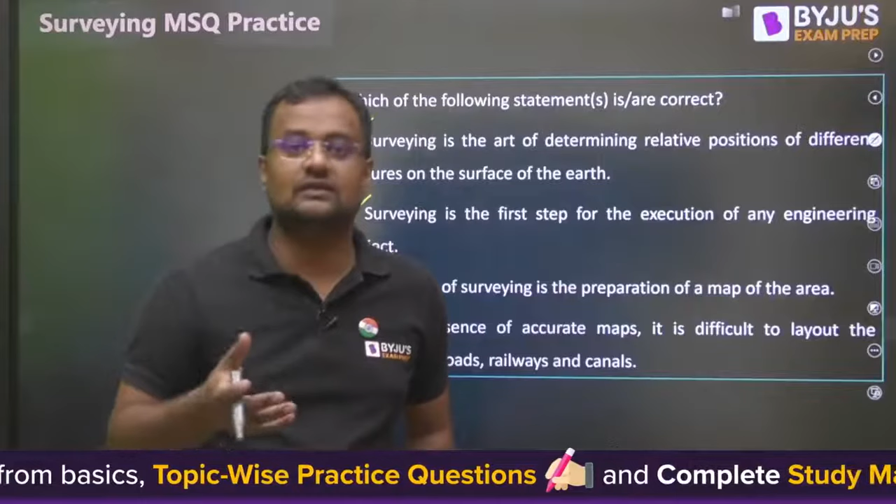Of course, the survey of that area has to be done for knowing the topography and all other things. Then after that, the object of surveying is the preparation of map of the area. After doing the inspection and taking the field readings, we draw the map of that area.

In the absence of an accurate map, it is difficult to layout. Yes, if accurate map is not there, it will be difficult.

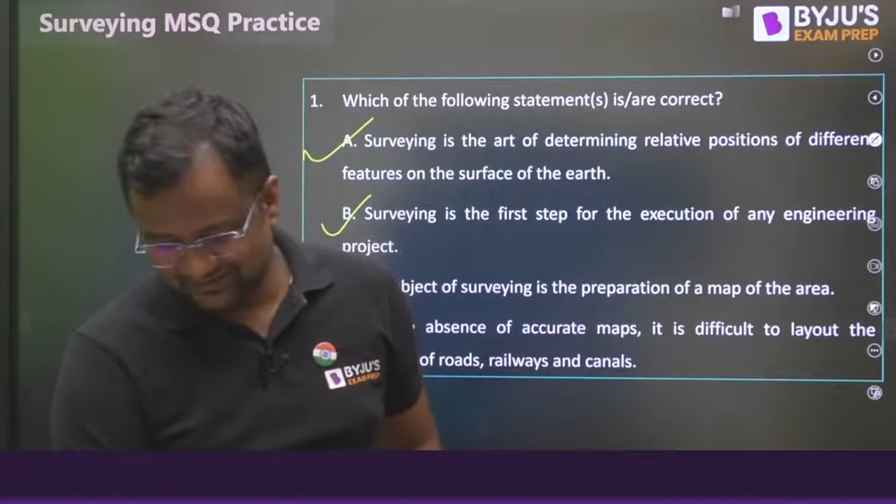So of course A, B, C, D all will be correct. Yes, Jadip, my offline student from Indore. How are you, Jadip? After a long time, yaar, very very excited to see you. Okay, A, B, C, D all will be correct.

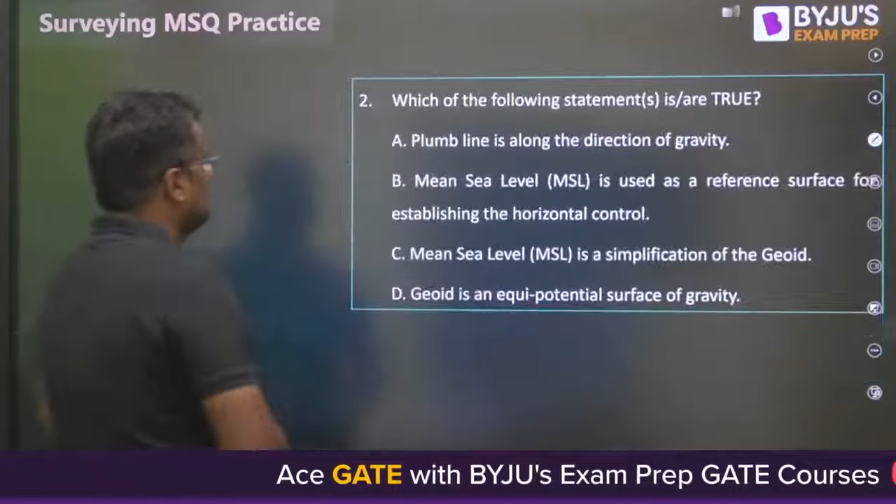Okay, so some of you are giving the answer by thinking MCQ. Okay Jadip, now which of the following statements are true? Plumb line is the direction of gravity.

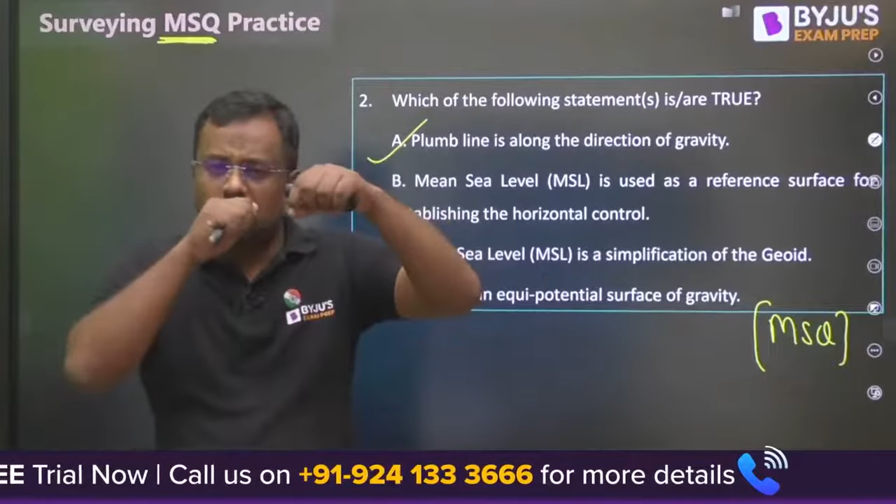Correct, okay, plumb line is the vertical line. At any place if you throw the plumb bob, if no other force is there, no wind force, then only gravity is acting, so it will be towards the center of earth. That is also called vertical line, that is also called the plumb line.

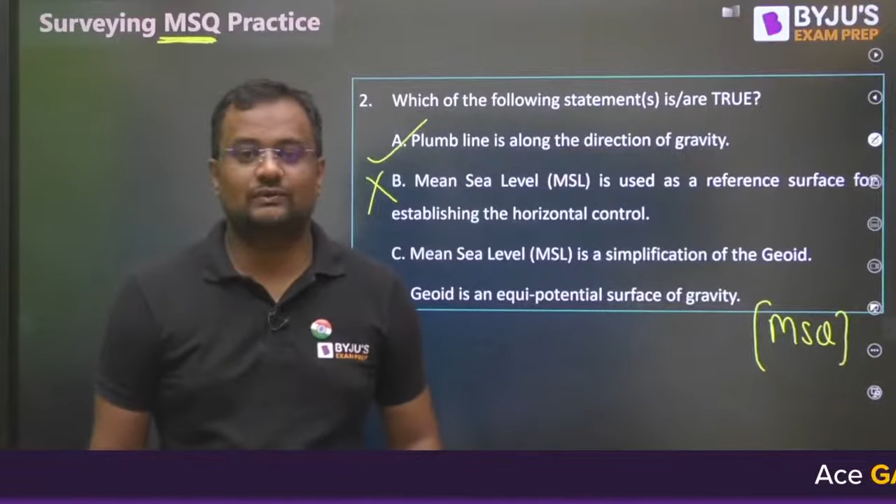Mean sea level is used to level, how? Mean sea level itself is not horizontal. So how will it be taken for referring or for plotting the horizontal points?

Mean sea level is above the earth, the water layer is like a sheet above the earth, so that is curved. Mean sea level is a geoid. Geoid is the shape of the earth. Water is above the earth, water takes the shape of that. So whatever is the shape of the earth, water is above that, so the same shape will be there.

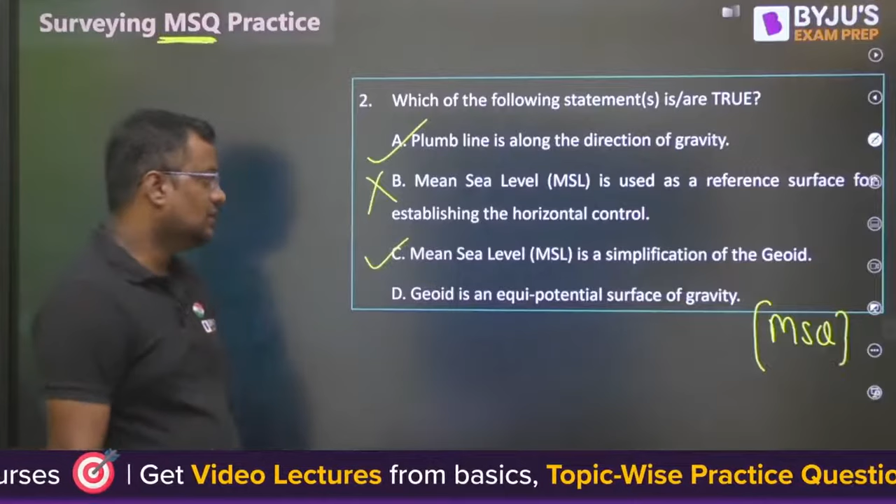Geoid is the equipotential line of the gravity. Yes, all the points on the surface of the earth have equal amount of gravity. So here it will not be ABD. Raghvendra, it is not ABD. It is ACD. Okay, so we started with some theoretical questions.

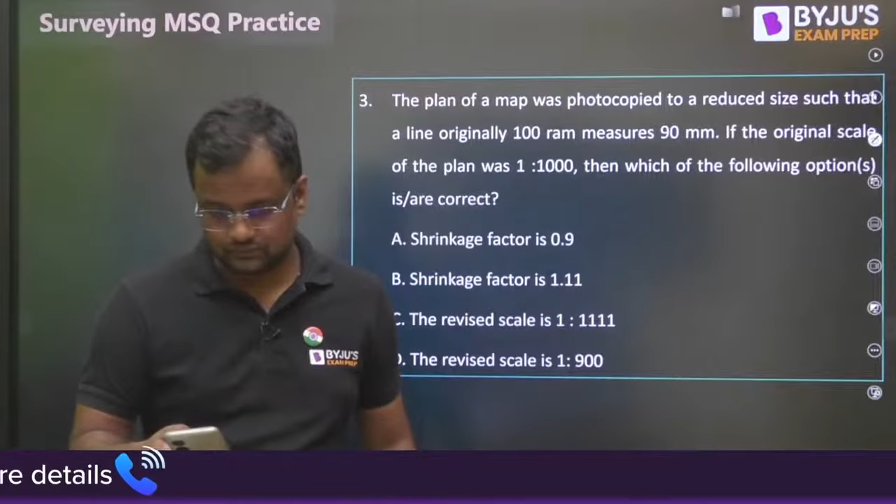My also one of the favorite subjects is physics. I also know that when you draw a tunnel here and leave a person here, the movement of the person will be harmonic motion. I also know that gravity is derived from the force between the two bodies. Mass M1 is the mass of the earth, M2 is the mass of that body, upon r square. This is the force between the two bodies.

Now from where does the acceleration come? Acceleration comes from force divided by mass. So acceleration, that means force divided by mass 2, is g, the gravitational constant. Mass of the earth is constant, r square is constant, this is constant, this is constant. From here, 9.81 is derived. Okay, Ahmed Saab.

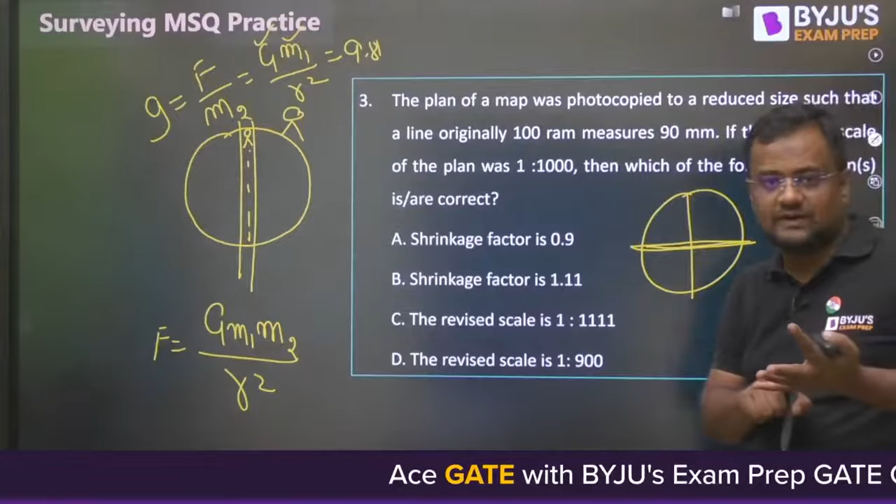Now geoid is not, earth is not exactly a sphere, because the polar axis is smaller, the equatorial axis is 43.5 kilometers bigger. Earth is neither a sphere nor an oblate spheroid, no regular geometrical figure signifies the shape of the earth. That is why a new name has been given, geoid. And from the geoid center, every place is not equidistant. That is why, since r is not the same, it will not be 9.81.

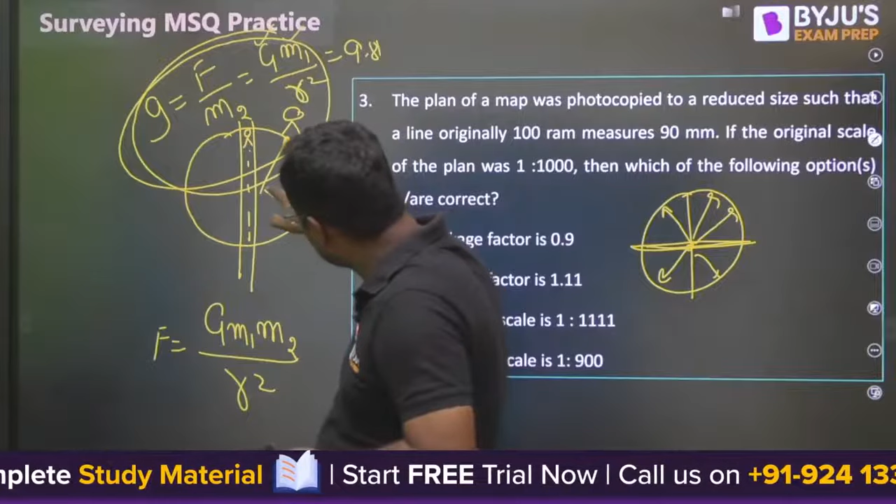This formula is considered when r is same. r at this point is also same, r at this point is also same, that is assumed to be sphere. Then this formula has been derived. The whole physics, and gravity being equal to 9.81, has been derived by assuming earth to be a sphere.

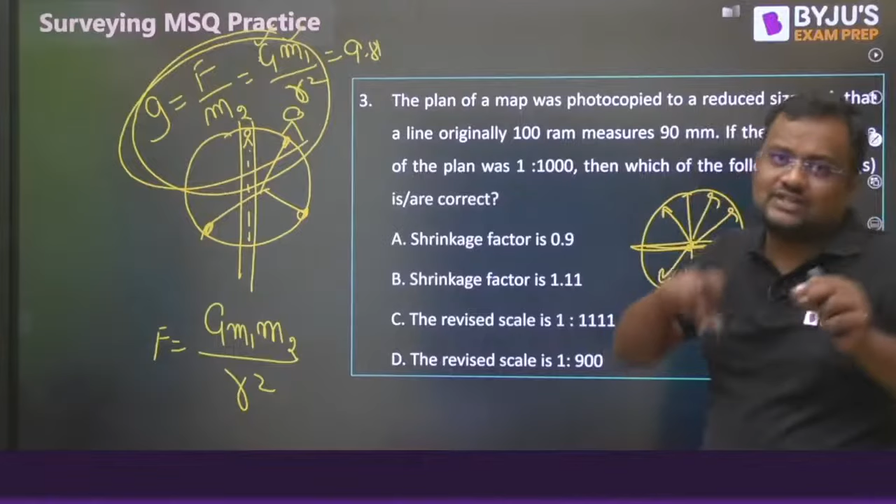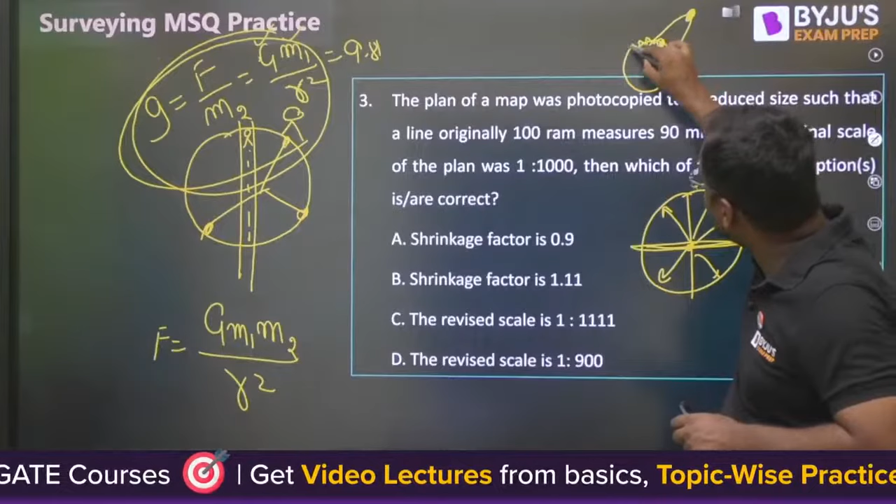So the point you are saying is it is an equipotential surface of gravity. In reality there is a little minute difference, but actually all these things are derived by assuming the earth to be a sphere. So yes, there is a little deviation - if you see, gravity is 9.81, but if you go to a very high altitude place or to space, on Mount Everest the gravity will be less.

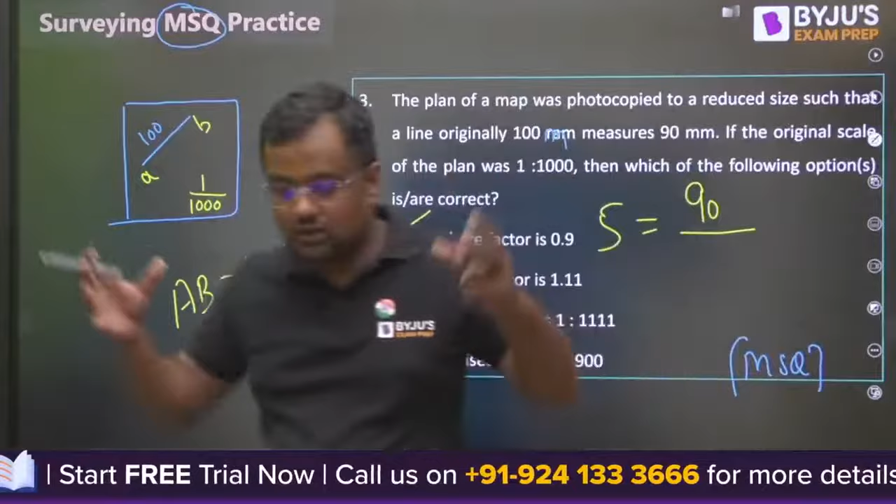On ground, if you take a small map of India, a big map of India, the distance between Delhi and Mumbai will be same. If you take a small map of India or a big map, the distance between Delhi and Mumbai will be same. So original distance will be same, that is 100 into 1000.

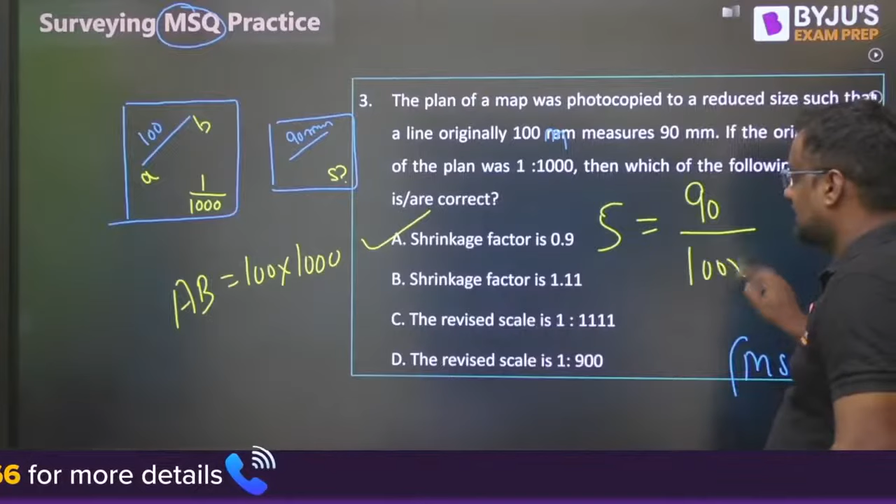From here, what value is coming? Please, can you let me know? What is the value coming? Is it coming 1 by 1111?

And I also told one more trick. Okay, this I derived, or I get the answer this way. One more trick guys - if the scale here is 1 by 1000 of the original map, 1 by 1000, can you see it below?

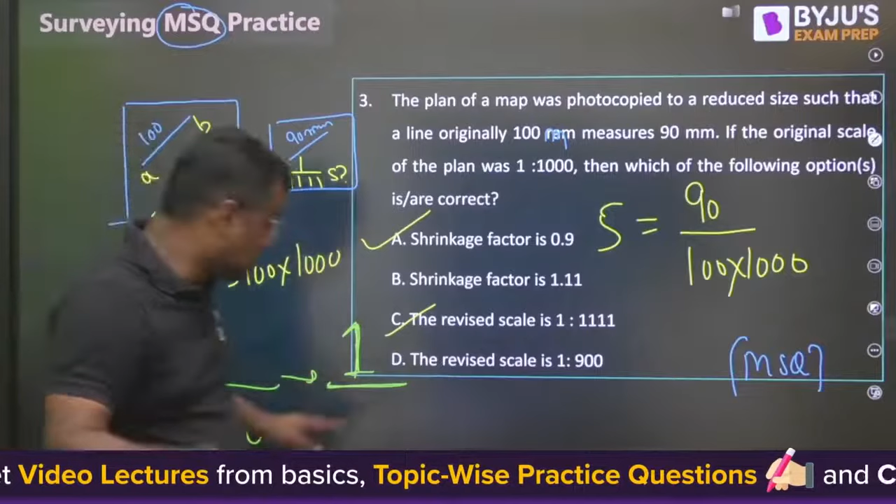Then the scale of the shrunk map is 1 by - should the numerator be more or the denominator be more than 1000, or less than 1000? Denominator should be more than 1000 or less than 1000?

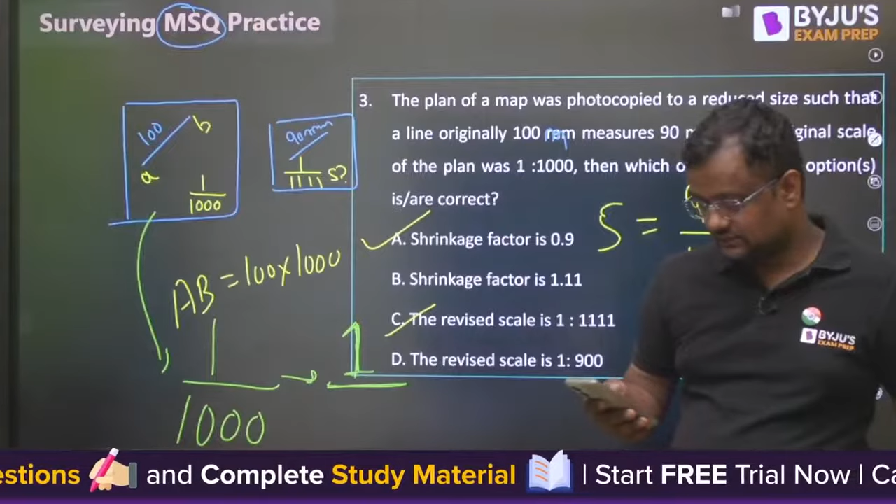Please tell me. Denominator should be more than 1000 or less than 1000? Please let me know, friends.

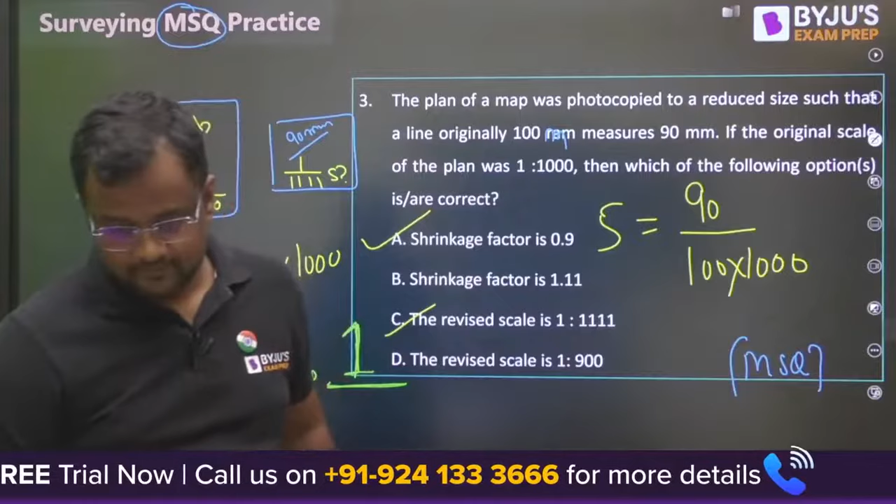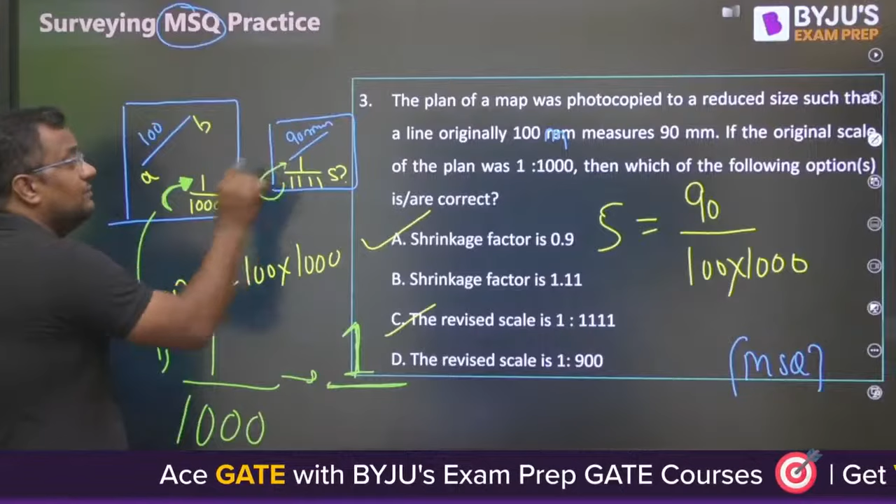Guys, here if 1000 is equivalent to 1, then my friends, if here 1000 is equivalent to 1, then here a very big number will be equivalent to 1, because it has even reduced the size of the map. If here 1000 is converted to 1, so here a bigger number is converted to 1, because this is a much smaller map of the same area.

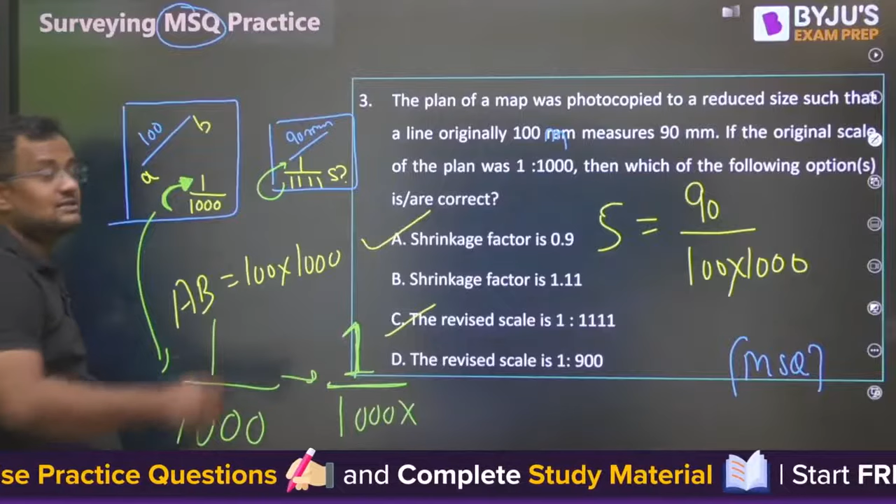So here, if it is reduced by 1000 times, here it is reduced by much more times. So it should be 1000 into a bigger number - 1000 into bigger number, and bigger number is 90 by 100 or 100 by 90. So bigger number is 100 by 90. This also will get the same answer. Otherwise, I have derived this as well.

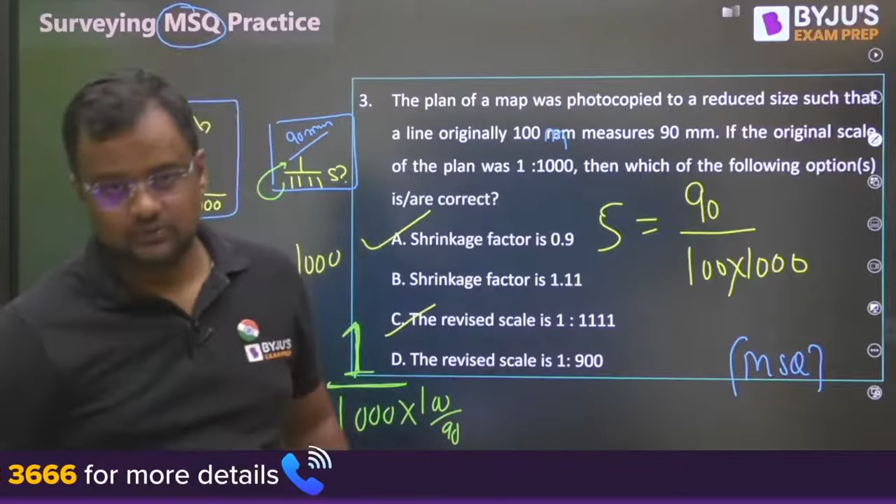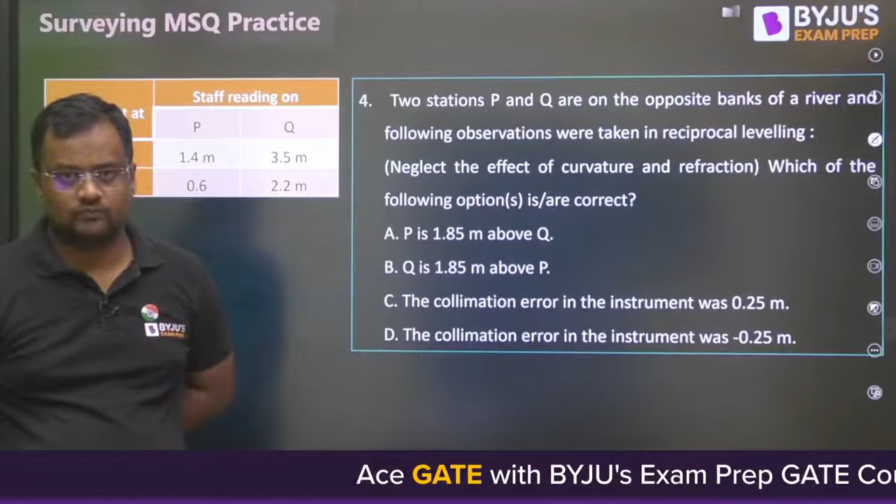Okay, the question based on reciprocal leveling. Please tell me the answer, everyone please.

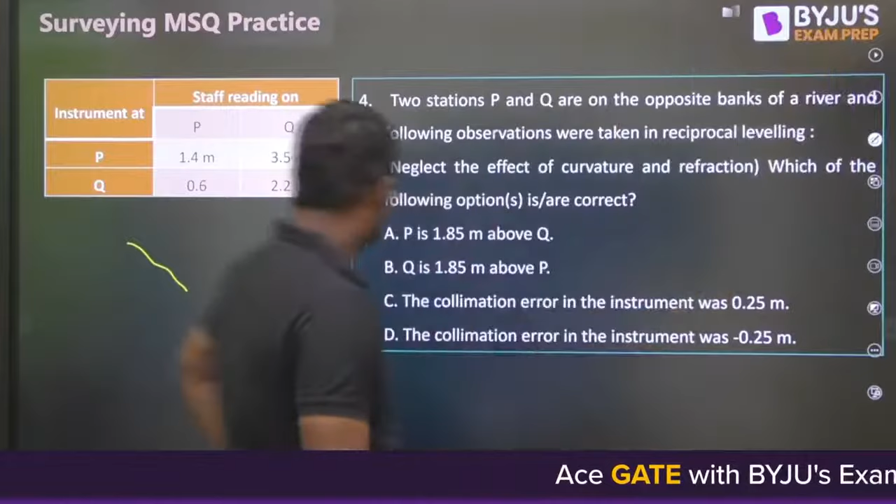Okay, so suppose I make the figure. This is the land here, this is the land here, and this is the water. Now this is P, this is Q, and here is a staff. Let me take a different color. Here is a staff at P, and here is a staff at Q.

Now here, if the instrument was very near to P, the reading here is 1.4 and the reading here is 3.5. When the instrument is near Q, reading here is 2.2 and reading here is 0.6.

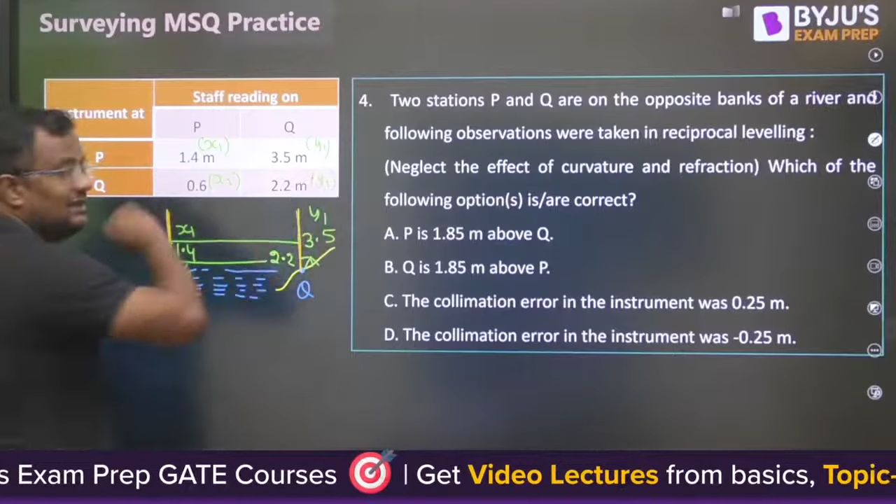This is also called x1, this is y1. This is x1, this is y1, this is x2, and this is y2. RLQ minus RLP is, you know the formula, x1 minus y1 plus x2 minus y2 and all that formula. From there you can get the answer.

Okay, so RLQ, the formula of reciprocal leveling, I am not going into that. x1 minus y1 plus x2 minus y2 divided by 2. So you will be getting 1.85. RLQ minus 1.85.

Please check, are you getting this? So minus 1.85 means RL of P is bigger. So option A. Are you getting the same answer?

Okay, similarly there is a formula of collimation error also: x2 minus y2 minus x1 minus y1 by 2, minus 0.0673 d square. Distance is not given, so we'll be neglecting that. Neglect, yes, this is neglected. 0.0673 d square is the result of curvature and refraction.

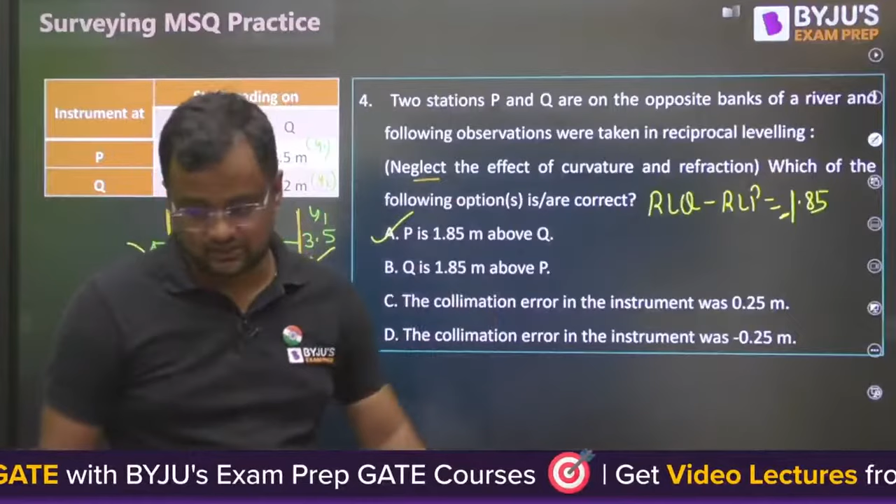So when you apply that, the collimation error in the instrument is coming to be 0.25 meter. You apply the formula, you will be getting a positive value. So A and C. I'm not writing down the formula.

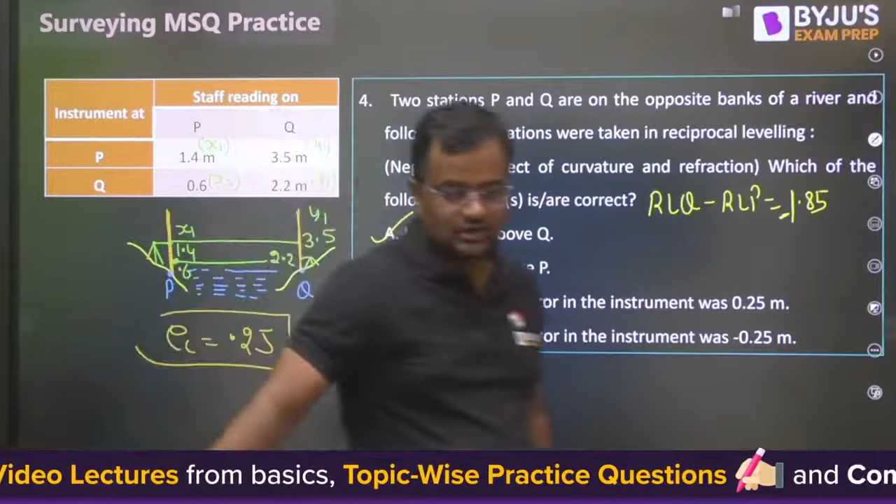Have you understood this? Keep sharing, guys. Why are the students less today? I don't know the reason, I don't know the reason. Why are the students less today?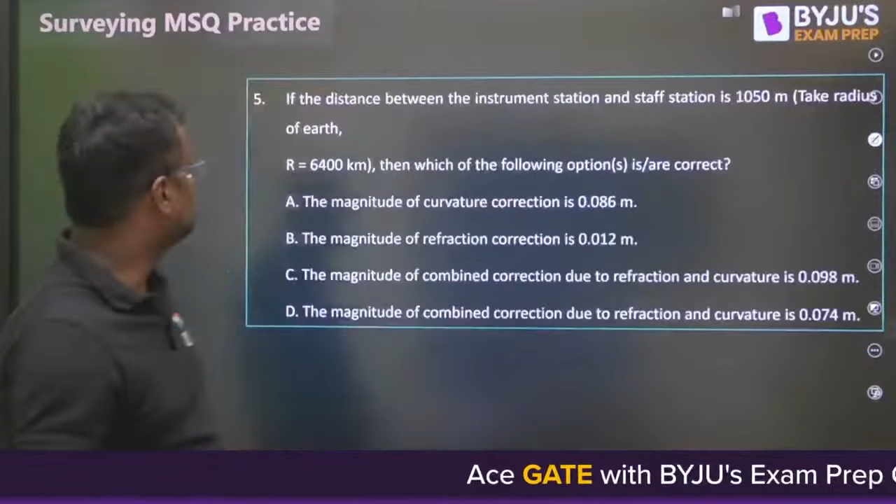Question number 5, again MSQ practice. Please do it.

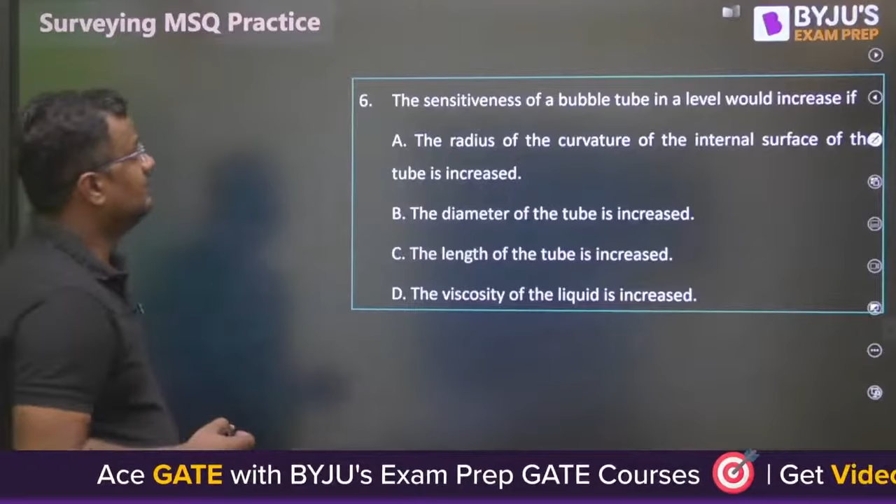The sensitivity is increased. MSQ, be careful. I want to know how many students find it correct. I want to know how many students got this correct.

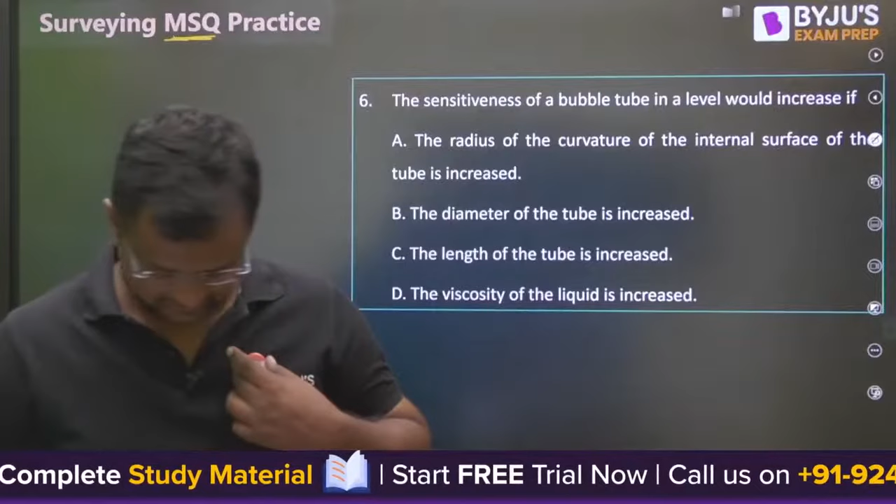Now see, sensitivity is D by R. If you want in seconds, 206265. What normal people think is that the radius is increased, so phi will be decreasing.

Okay, that is normal life. But what is the twist? Guys, if radius is increasing, phi will be decreasing, but lesser phi represents more sensitive. The radius of curvature of the internal surface of the tube increases, and lesser phi represents more sensitive.

Now let me tell you, if sensitivity of this is 2 seconds and sensitivity of this is 4 seconds, that means if we deviate this by 2 seconds, the bubble moves by 1 division. Here if sensitivity is 4 seconds, after moving it by 4 seconds the bubble moves by 1 division. So of course this is more sensitive. With just a 2 second deviation, the bubble is moving, so that is more sensitive. So lesser phi magnitude is more sensitive.

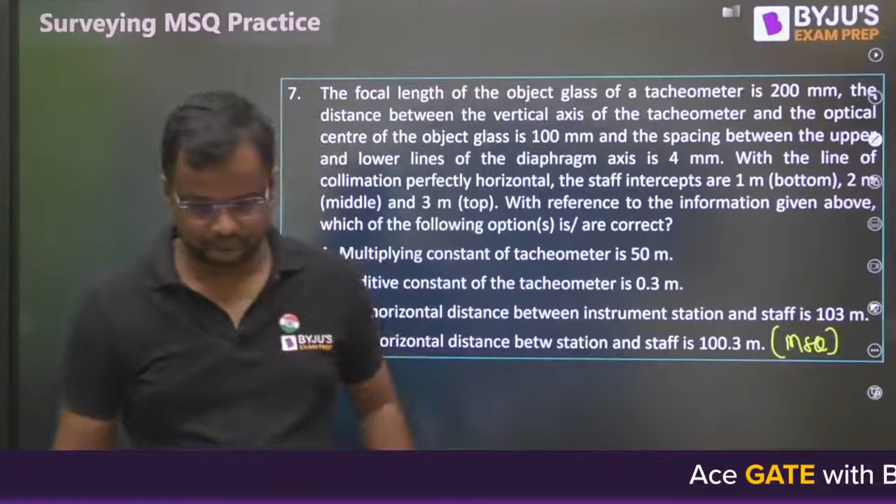So now let's move to question number 7 of tacheometry. Again an MSQ. Guys, come on, everyone do it. Kill this question.

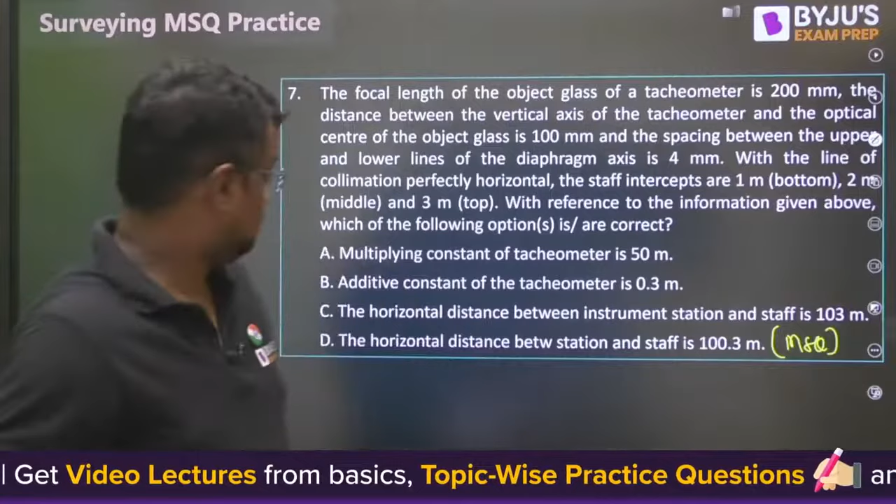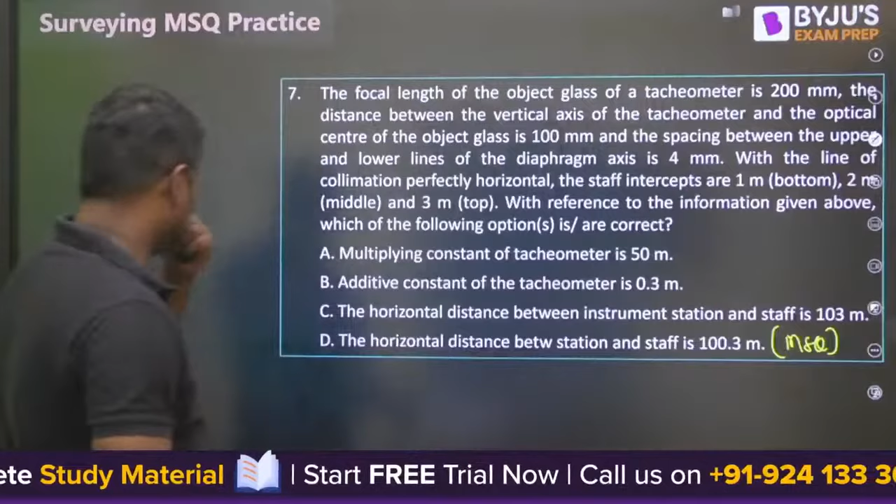Multiplicative constant k. So k is f by i. So what is f? 200 mm. And what is i? The distance, the optical center is 100 mm, and spacing between the upper and lower is 4 mm. So k is 50.

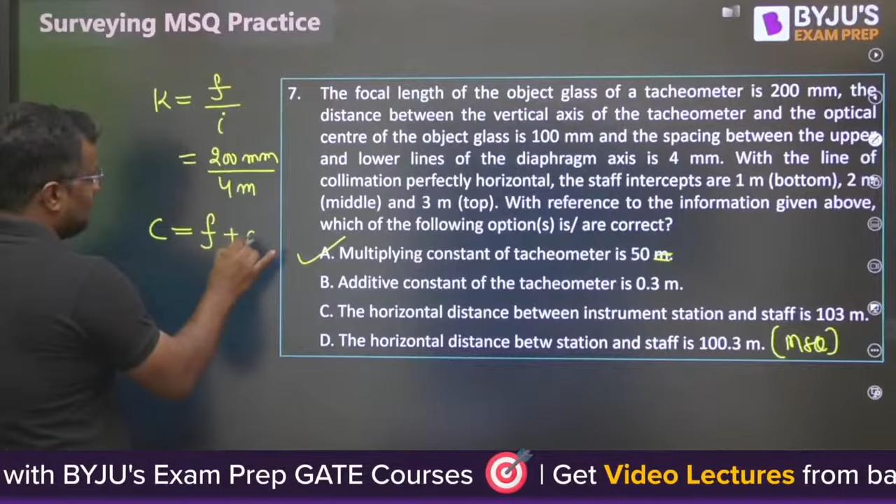K has no units. Okay, additive constant C. D is equal to Ks plus C. K is multiplicative constant, C is additive constant. So additive constant is F plus D. Okay, so what is F?

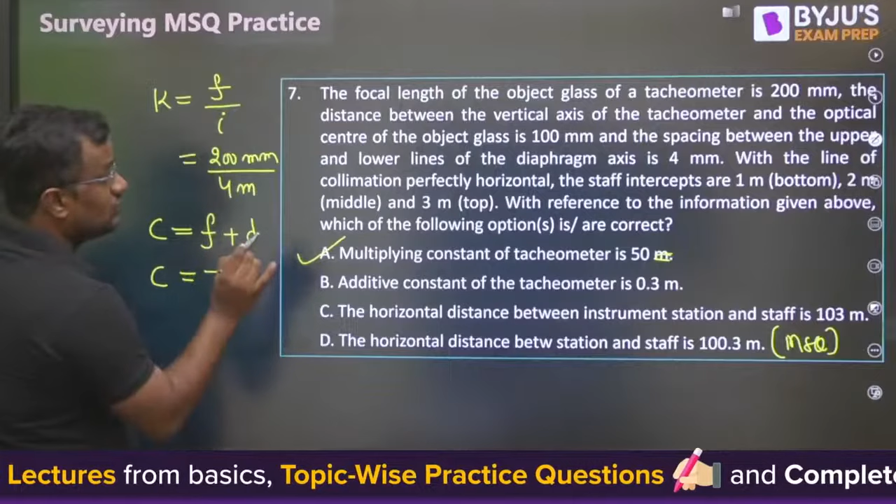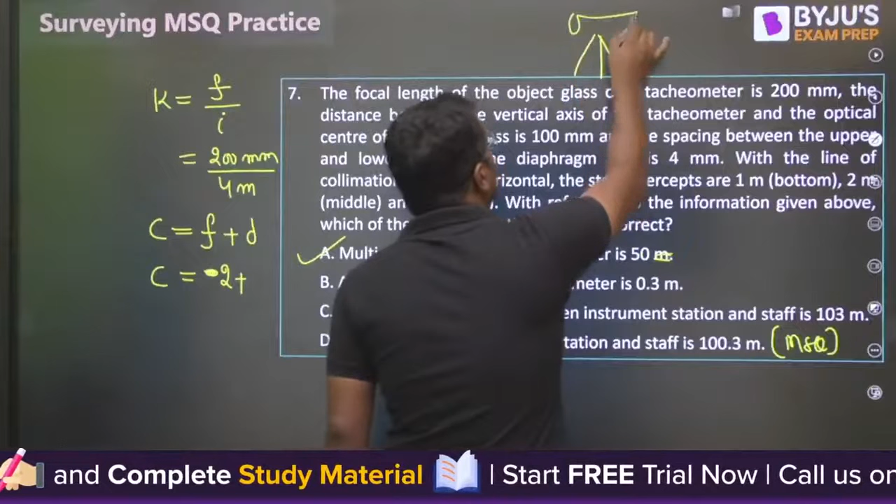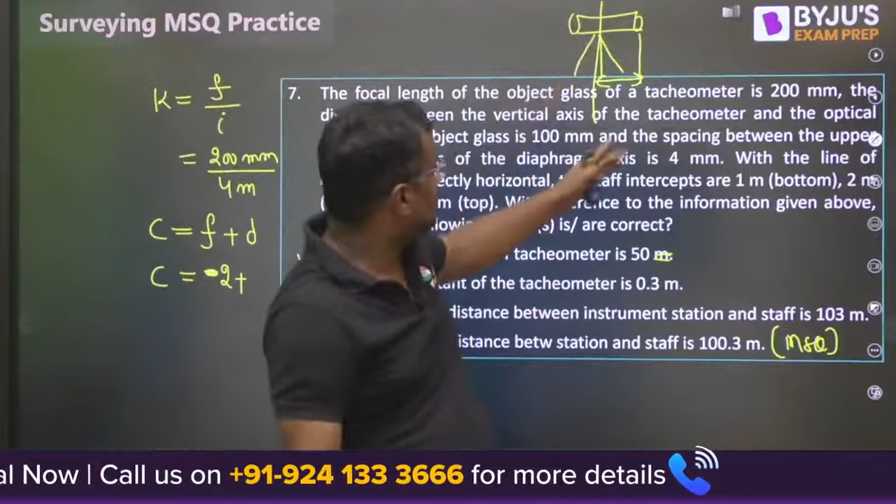F is 50 mm - sorry, F is 200 mm, that means 20 centimeters, 0.2 meter. And what is D? D is from center of tacheometer to distances. The distance between the vertical axis of tacheometer and the optical center of objective is 100 mm. So 0.2 plus 0.1 is equal to 0.3 meter.

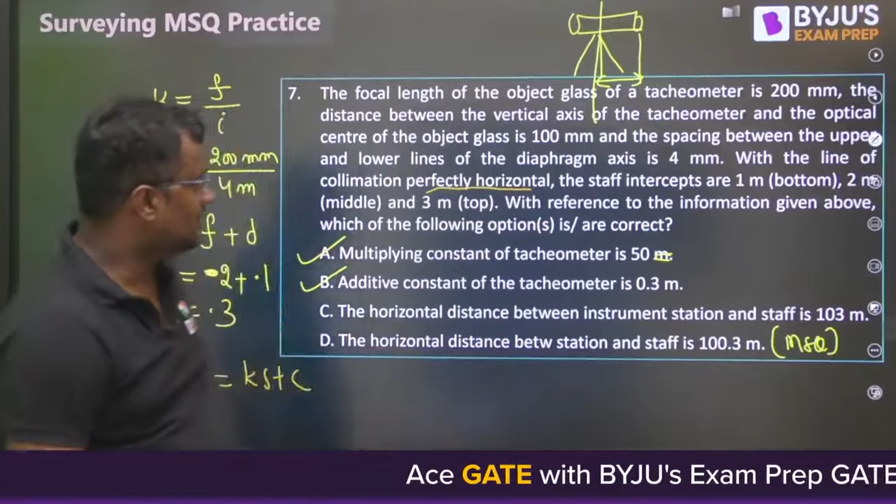Now the horizontal distance. Here we can apply the formula D is equal to Ks plus C, because the line of sight is also horizontal and staff is also vertical. Is it written somewhere - perfectly horizontal and staff intercepts are 1, 2. So Ks plus C. What is K?

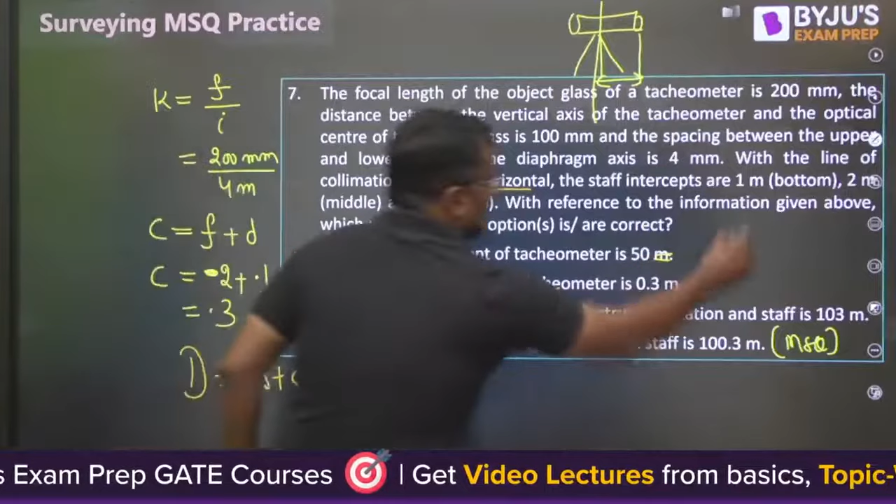K is 50. What is S? 1 meter, 2 meter, 3 meter - so S will be 2 meter, since lines are cutting here at 1, 2, 3. So S equals 2. Ks plus C is equal to 0.3, so it comes to 100.3, that is option D.

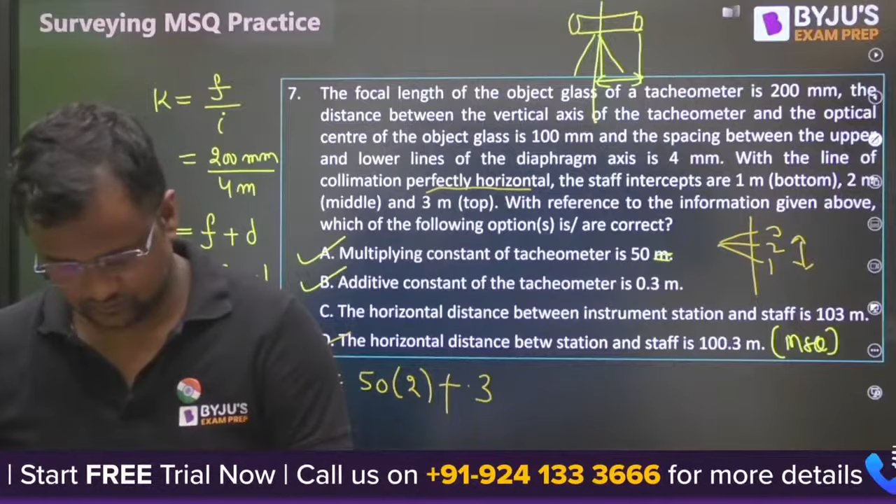A, B, and D. Are you also getting the same? Please let me know, friends. Getting the same value?

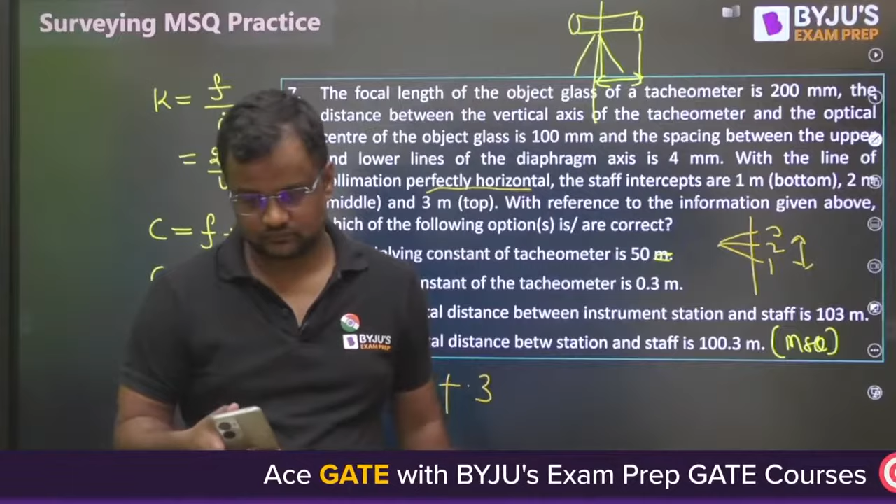Okay, yeah, this one now.

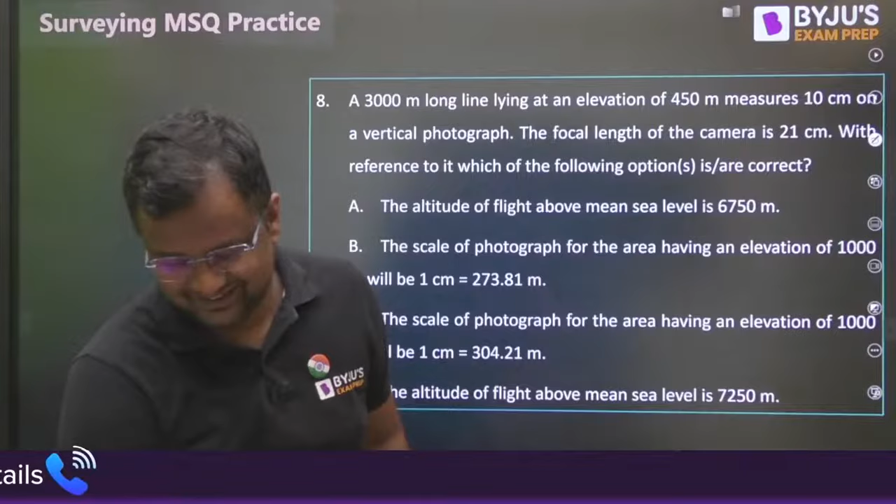Which question is it? A 3,000 meter long line on an elevation of 450 meter measures 10 centimeter on a vertical photograph.

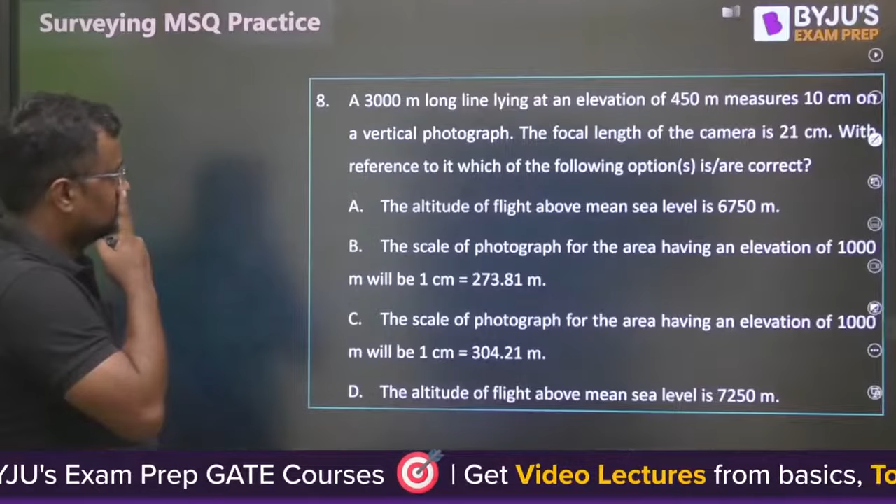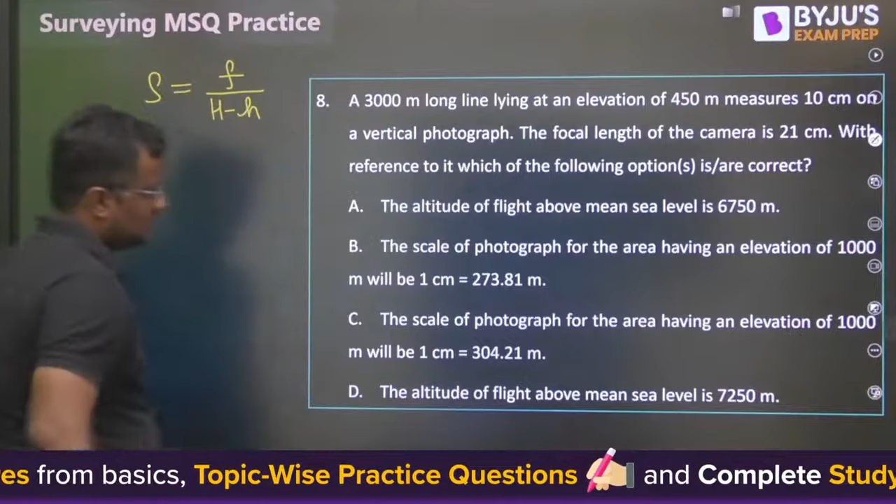Let's find the altitude. First, scale is equal to F upon capital H minus small h. Now, it measures 10 centimeter, so 10 centimeter means 0.1 meter and original length is 3000. So this is the scale: map distance by ground distance is equal to F. F, the focal length of the camera, is 21 centimeter. So 0.21 upon capital H minus small h, and elevation is 450.

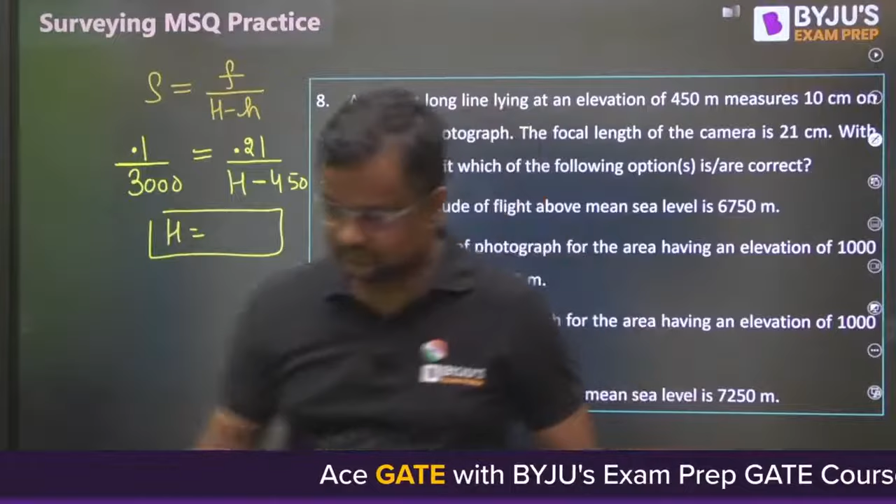From here, tell me the value of capital H. Quickly tell me, how much is it coming? 6750 is coming.

So this will become right. Please check: scale of the photograph, the area having this elevation. So now F is this and capital H is 6750, and small h now is how much? 1000. So how much is this? Please check everyone, it should be 1 by 273.81.

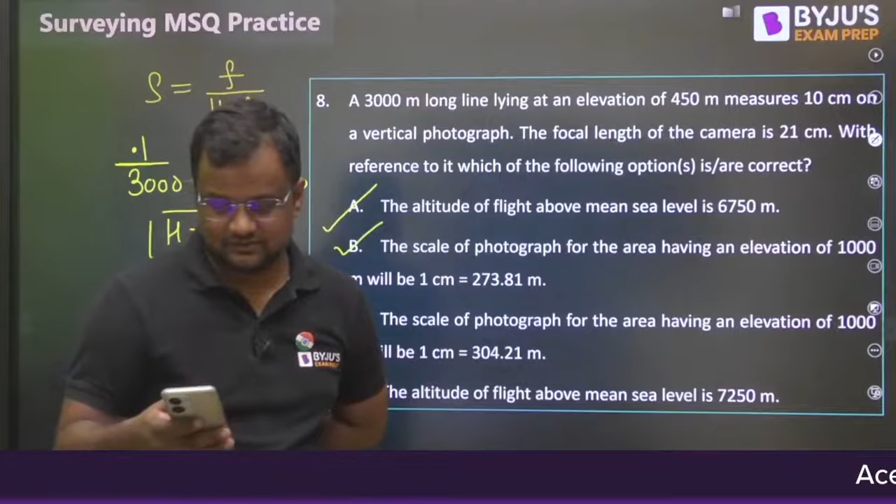It might be coming as option B. Please do check, everyone. Are you getting this?

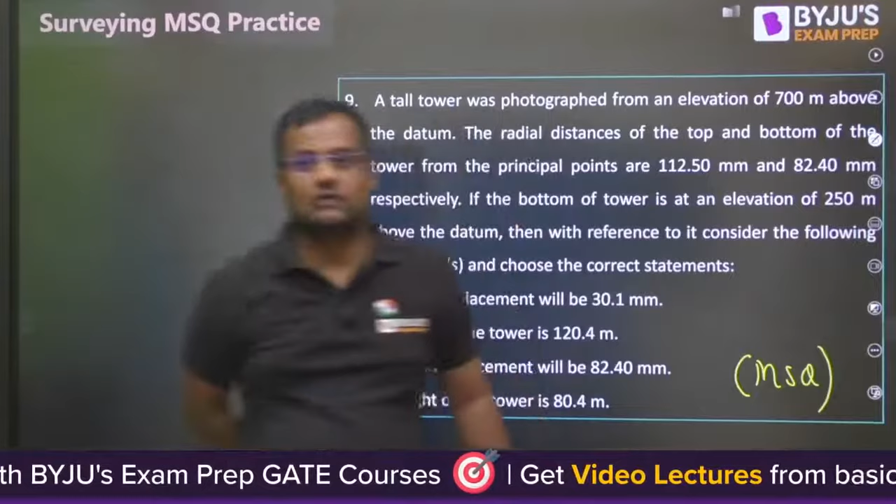Okay, now 9th question, this is MSQ. All these questions are MSQ. Now the question is again based on photogrammetry. Go on, tell me.

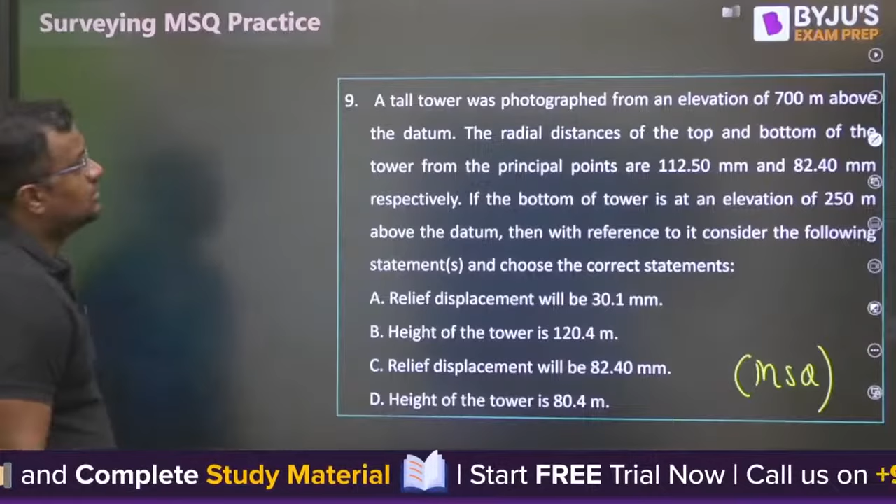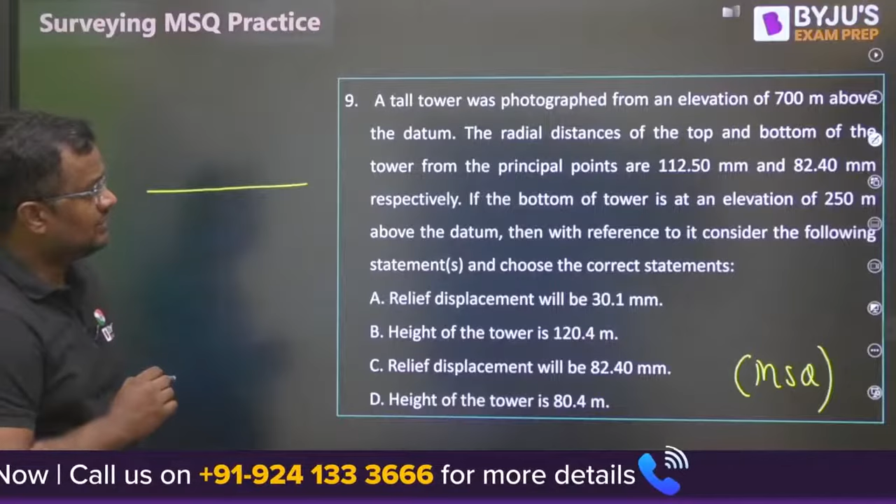A tall tower was photographed from an elevation of 700 meter above the datum. The radial distance of the top and bottom of the tower from the principal point are 112 and 82.4. So what is the relief displacement? If this is the photo, the distance of these points from the principal point is 112 and 82.4, so this is 82.4 from here to here, and this is 112.

So what is D? D is 112.5 minus 82.40. What is the value of D? Please check, it should be 30.10 mm. Correct or not?

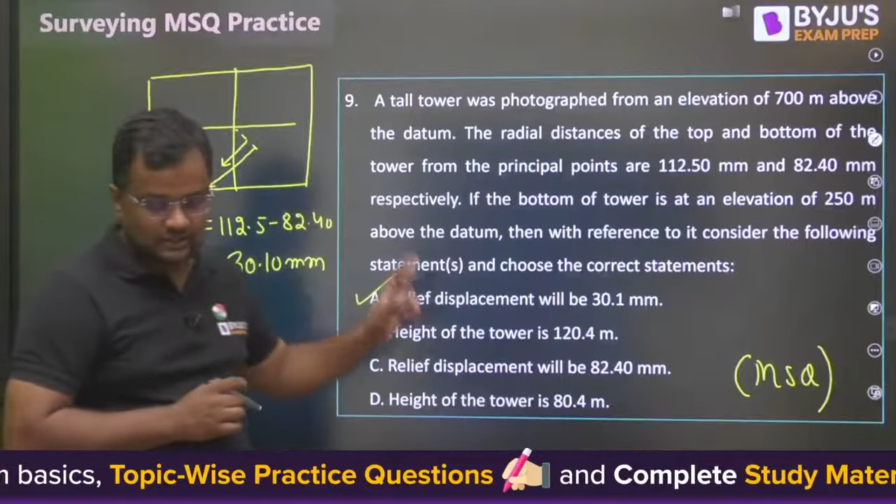Okay, so relief displacement is this, option A is correct. Now height of the tower is asked. So D is equal to R into H by capital H. D is known, what is capital H?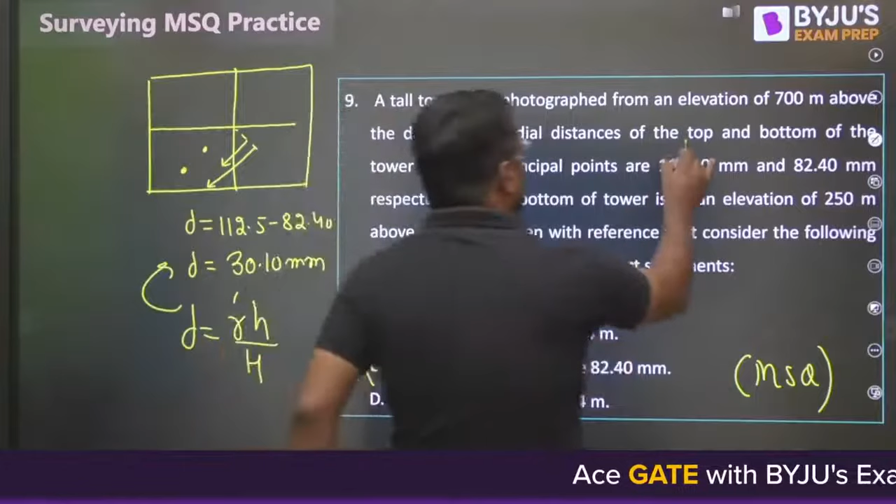Tell me, what is capital H? What is R? R is the distance of the top point of the photograph. That top point of the photograph you have is 112.5. The value of R is 112.5. R is also known now.

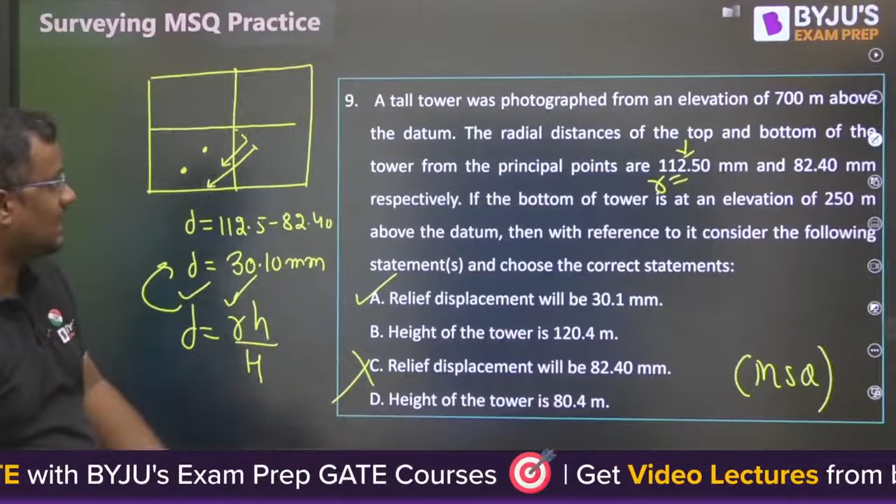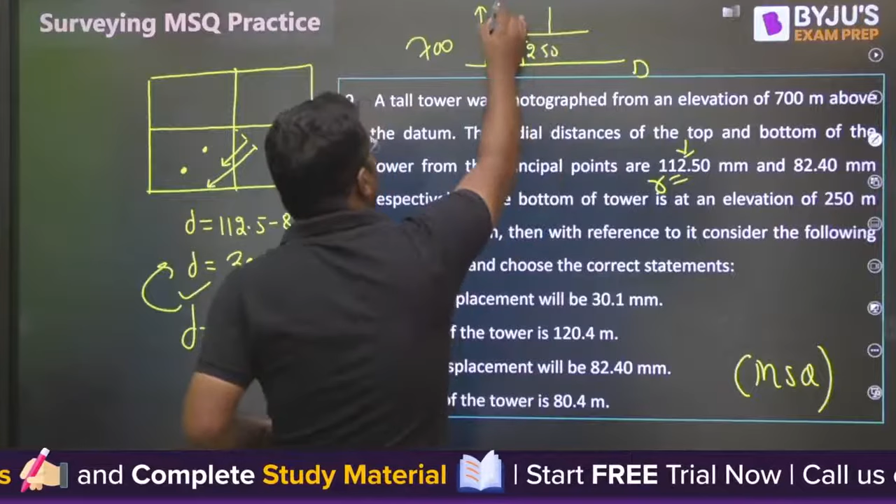The bottom of the tower is at elevation 250. So capital H is the height above the base of the tower, that is 700 minus 250, which equals 450.

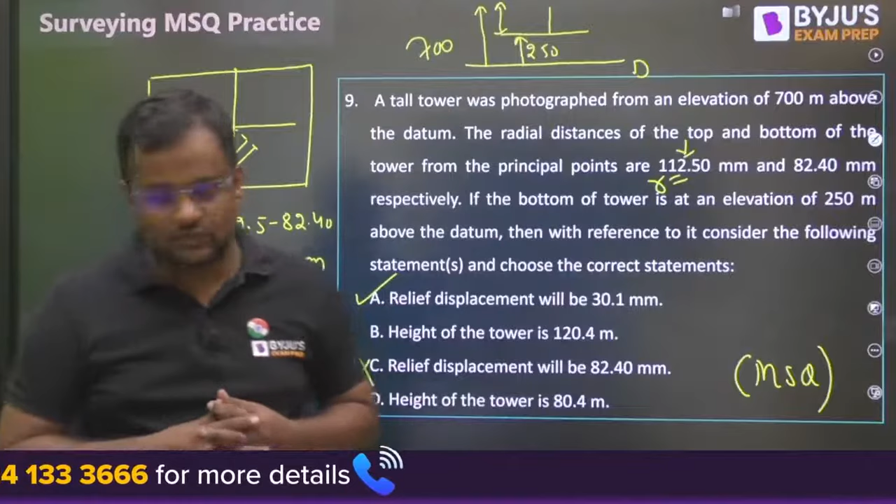Now out of the 4 variables, 3 are known. So what is H? 120.4. Options A and B are correct, A, B, D - D is left out, D is not in this. Have you got it, guys?